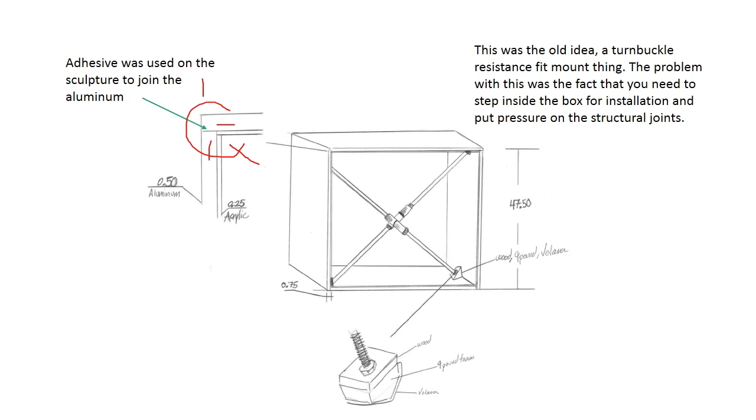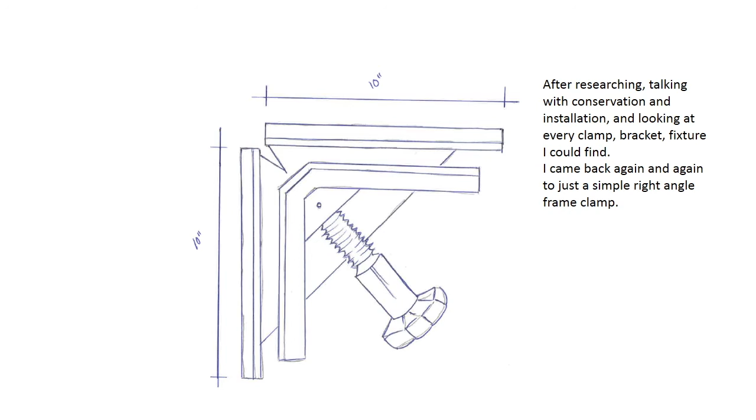This illustration depicts what was the preliminary ideas. The idea was to stop the object or Judd boxes from rocking side to side while being shipped across the country. So after researching, talking with conservation and installation, and looking at every clamp bracket fixture system I could find, I came back again and again to just a simple right angle framing clamp.

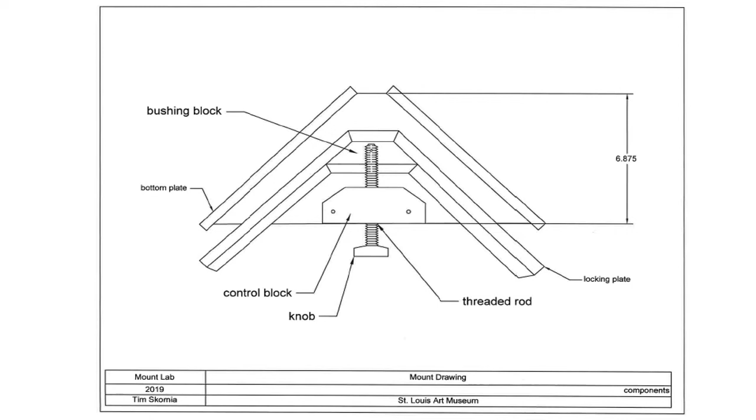Here I'm starting to work out some of the details for how this bracket would be assembled. As you know, as a mount maker, you most likely are not going to be able to find what you're looking for without having to fabricate it yourself. So having the ability to use Autodesk or any system like that is very beneficial. So here we have the bushing block. We have the control block. And we have the threaded rod.

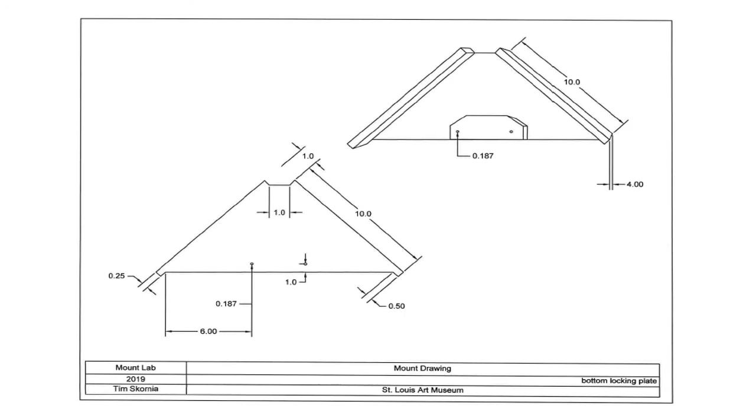This is a drawing of what is the bottom plate of aluminum. Here we have the bottom plate with the locking plate attached with fasteners, as well as the two plates that would be welded in position on top of the bottom plate. Here we have the internal locking plate and what is the pitch angles for weld placement.

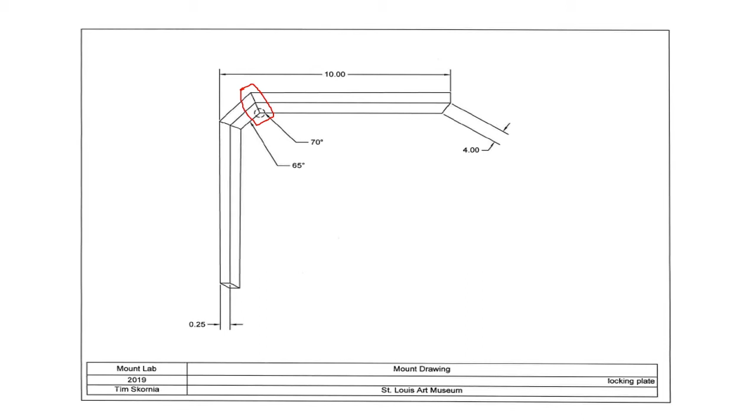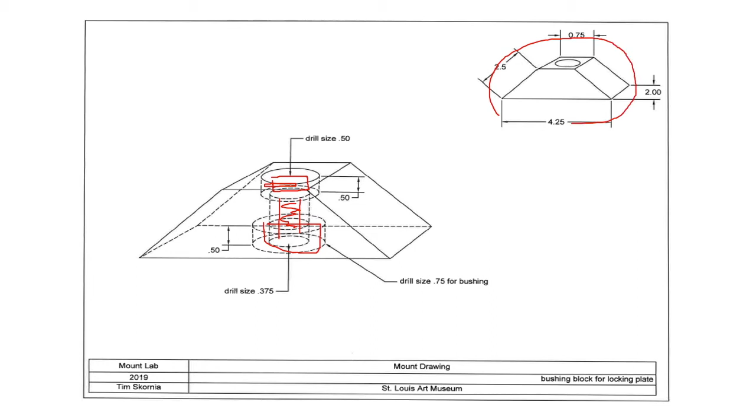This image, we start to see what's going to happen internally. So you have this hole here, which is milled out, and this is to accommodate what will be the spring pin, to allow clearance for the spring pin to set into. Here's where your threaded rod will come through. This is where your bushing block will be press fit into. And this is what it looks like externally.

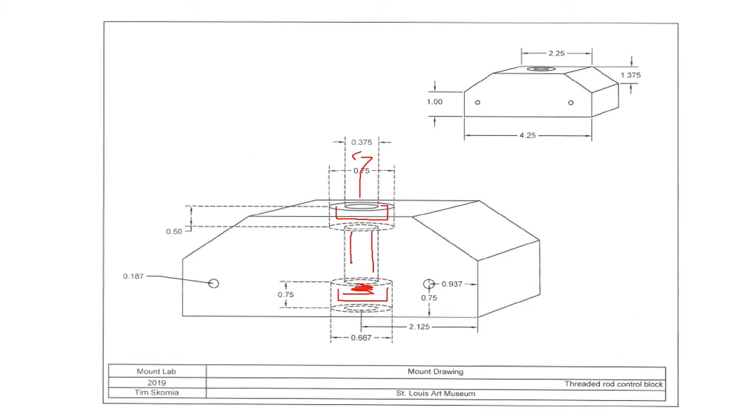This is the threaded rod control block. So this is the bottom block. Here's where your threaded rod will pass through. This spacer here, this is threaded. So this is to allow for the threaded rod to turn within the block itself. And then here's your secondary bushing, and that is to stop it from swaying side to side within the block itself. And again, here's what it looks like externally. Here's your bushing, press fit into the top.

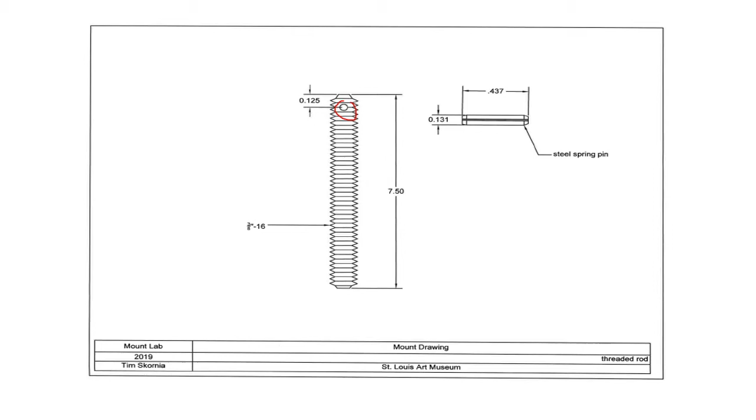The threaded rod: to me, it's important to show even the most minute details, down to the spring pin, what size, the hole diameter. This just makes it easier for the machine shop or fabricator, whoever that is, to put this thing together for you if you're doing it out of house. So I think it's very important to break it down piece by piece, component by component, just to allow for you to not have to rework anything in the future.

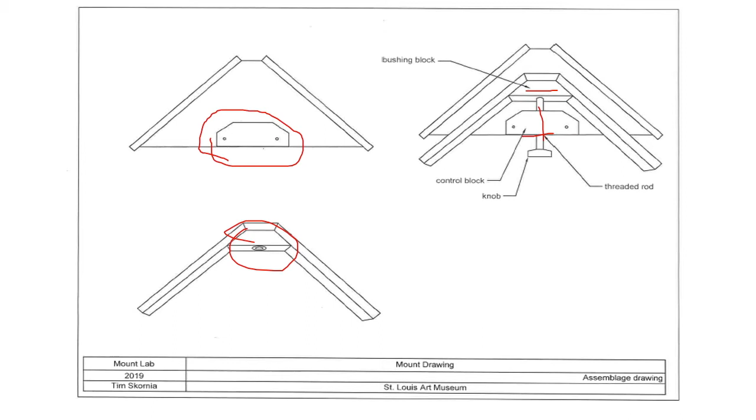Here we have all those drawings and all the components and how they work together. So you have your bottom locking plate, your top, you have the control block, the bushing block, and the threaded rod, and how they all work together to make a simple right angle clamp, just on a larger scale.

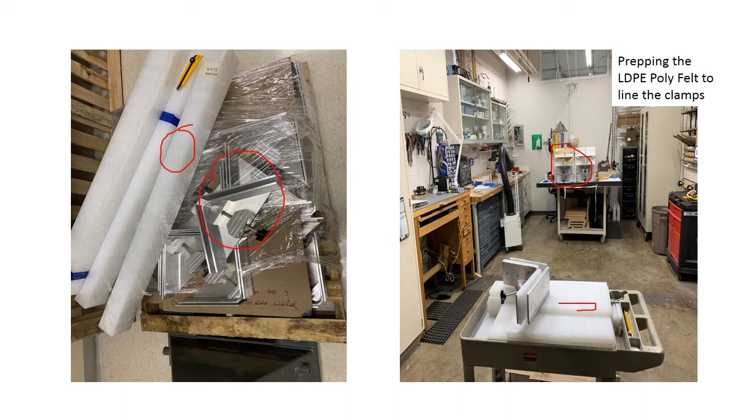So to your left, you'll see the LDPE, low density polyethylene, the 32 mounting brackets all on a pallet as they came back from the shop. To your right is an in-process photograph of everything that had to happen before lining the components. So here we have the LDPE after it had been cut and all the edges had been beveled.

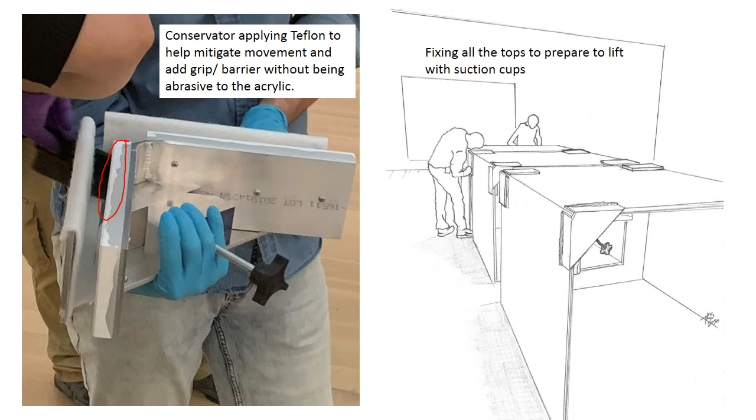Before every installation or shipment, I always will carry out a test fit. This is an image of myself doing a test fit with one of the other preparators that works at the St. Louis Art Museum. To your left is an image of an objects conservator applying Teflon to the LDPE to act as a secondary barrier.

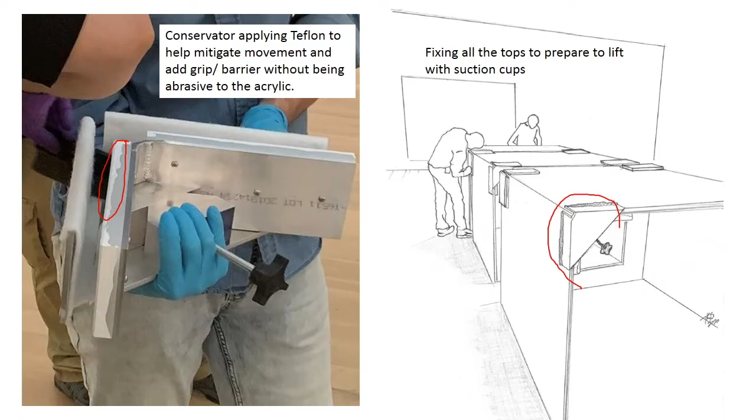To your right is an illustration done by myself of the installation crew putting on all the fixtures to the Judd boxes. This was carried out because of image rights concerns, and luckily I went to art school so I can draw pictures. Here we have an illustration of the suction cups that were used, 4 to either side. That would be 4 art handlers for each Judd box as they place them on pallets. Here are all the fixtures in position on each Judd box as it was placed on its pallet.

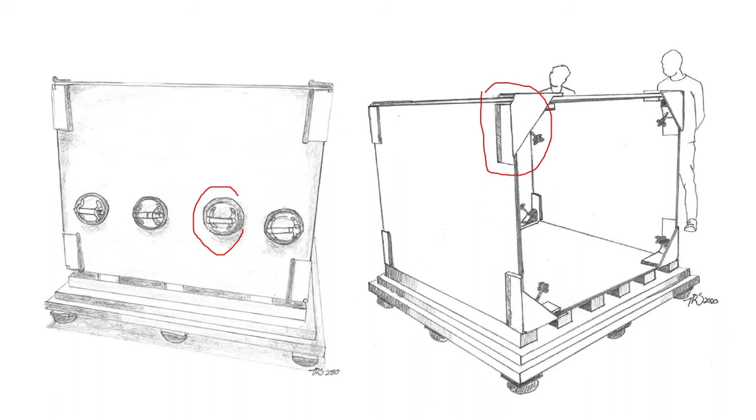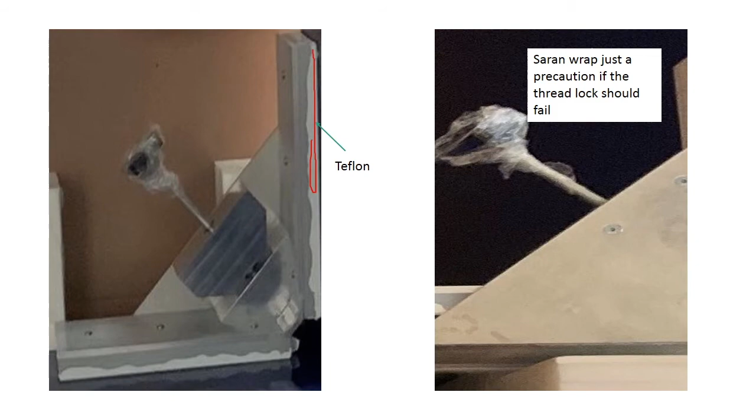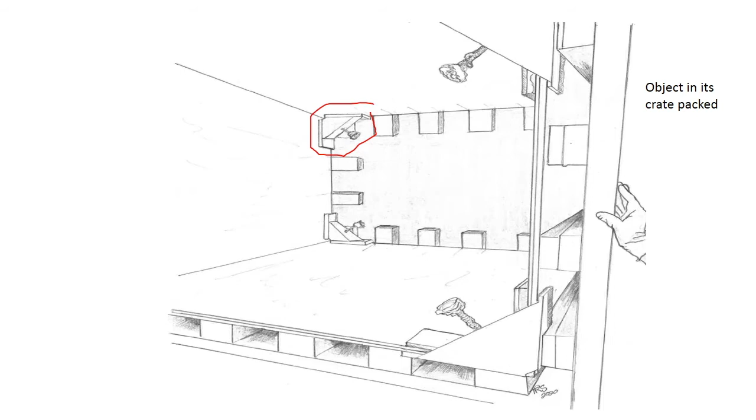This image is showing the slots that were cut into the foam and Volara to accommodate the fixtures themselves within the crate. You can see how the Teflon was used to act as a barrier in between the fixtures and the Judd boxes themselves. This illustration is showing what the Judd boxes look like packed within the crate and how all the foam worked to accommodate the fixtures themselves in all the slots that were cut.

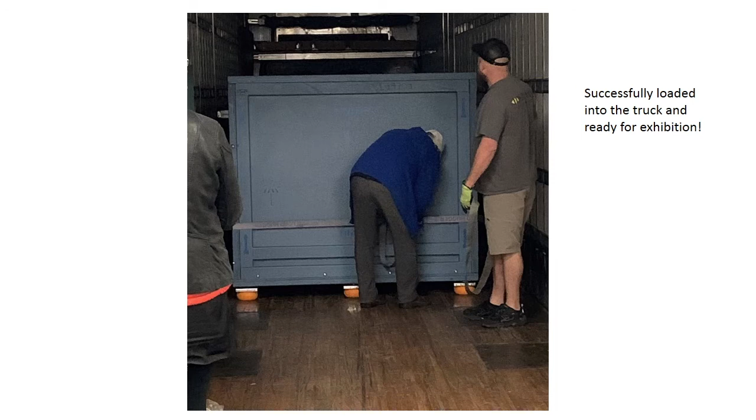Here we are loading into the truck. Everything was a success. Moving on to somewhere else in the country for exhibition. Here we are at the end of the presentation. Hopefully it was not too short, not too long.